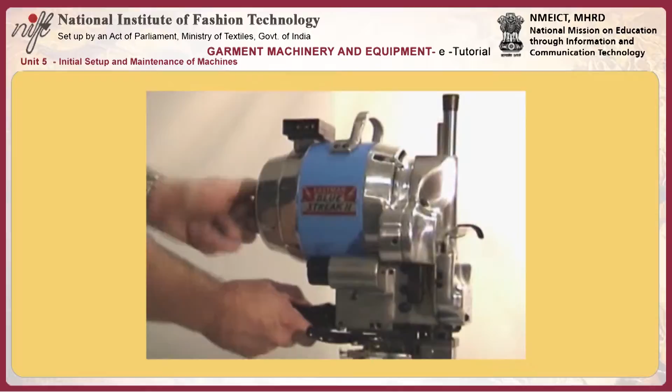Make sure that the sharpener is in the locked position. To do this, push in the turning knob. While depressing the turning knob, turn the machine over a few revolutions by hand to see if the knife reciprocates easily. If the knife does not move easily, the sharpener may be in the unlocked position.

To lock the sharpener in place, lift the release lever and press the sharpener lever to release the sharpener. Raise the sharpener bracket by hand to lock it in place. Once the sharpener is locked in place, you may disengage both the release lever and sharpener lever. Repeat this step to ensure that the sharpener is now locked.

Visually inspect the blade to ensure that the top of the knife is flush with the knife lock bolt and that the knife is perpendicular to the base plate.

If you need to adjust the alignment of the blade, check to see that the machine is unplugged. Make sure the sharpener is in the locked position. Raise the pressure foot to the top position using the pressure foot lever, which is located next to the machine operating handle. Lay the machine on a table.

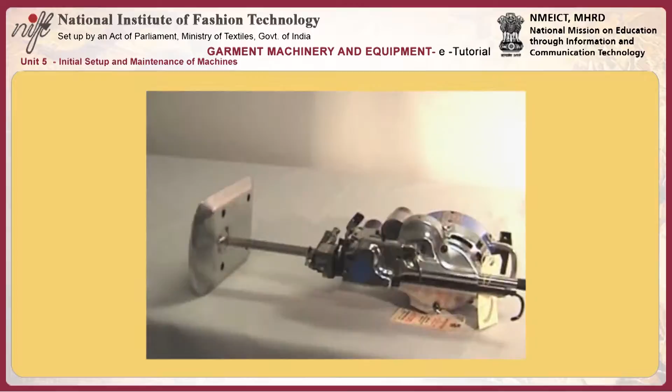Press in the turning knob and turn the knife to the bottom position. Insert the T-handle knife bolt wrench and loosen the knife lock bolt. Be sure to set the knife tightly against the knife lock bolt.

Hold the bottom of the knife against the back of the slot in the standard and tighten the knife lock bolt. After tightening the knife lock bolt, check to see if the knife runs freely in the standard by rotating the turning knob. Check that the motor switch is in the off position.

Then, connect the attachment plug to the terminal block on the machine. Hold the operating handle and turn on the machine. Allow the blade to reach full speed. If the blade is struggling, the sharpener is still not in the locked position.

If this is the case, turn off the machine and do the following. With your left hand, straddle the front of the sharpener with fingers and thumb. Press the bell crank release lever to disengage the sharpener mechanism from the motor.

With your right hand, hold the operating handle and turn on the motor switch. Allow the motor to gain full speed and then release the release lever. This automatically returns the sharpener to the locked position.

Turn the motor on and off a few times before running the machine continuously. This permits the oil to warm up and flow easily into the close-fitting moving parts. Failure to do this may result in damage to your machine.

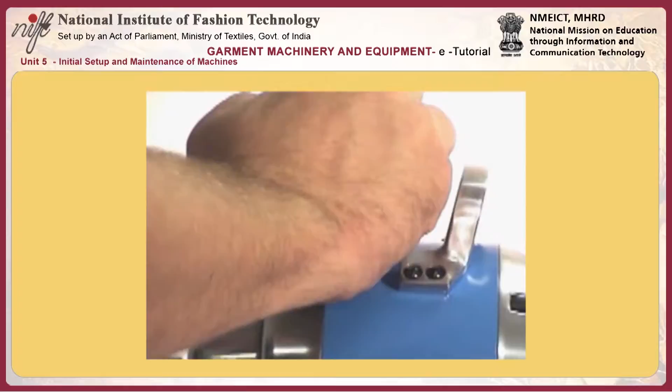Caring for your straight knife. Remember to unplug the machine before performing maintenance, adjustments, or repairs. To ensure proper operation of your machine, it's recommended that you perform the following procedures. On a daily basis, the machine operator should remove the knife and clean the knife slides with the slot cleaner.

To prevent undue accumulation of lint, do not oil the plate rollers. If the rollers stick, remove them from the plate and wash them in cleaning solvent.

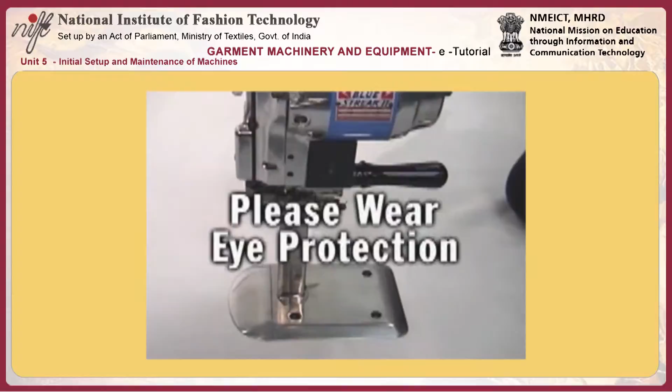Twice weekly, use an approved air hose or bellow to blow any lint from around the motor and sharpener. Remember that eye protection must be worn whenever using an air hose or bellow, as failure to do so may result in serious eye or facial injuries.

On a weekly basis, remove the cover and clean any lint from around the screw mechanism in the sharpener. If performed on a consistent basis, these preventive maintenance procedures will help you ensure years of top performance from your quality Eastman product. Should you use your machine around the clock, it is recommended that you perform these procedures more frequently.

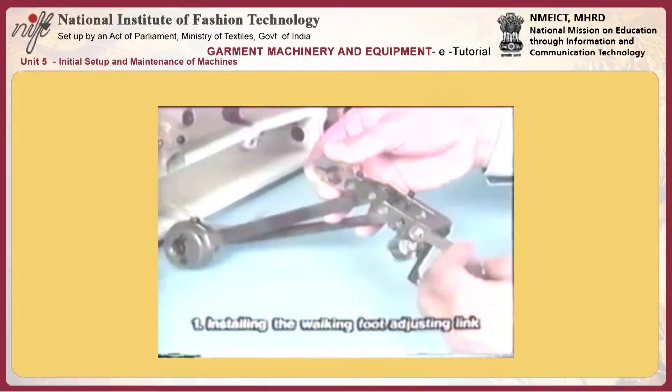Set the walking foot adjusting link as shown on the screen. Fit the feed drive eccentric cam into the frame, taking care of the correct installing direction.

Place the feed regulator mounting base pin into the hole in the feed regulator and tighten the screws, preventing play and extra load.

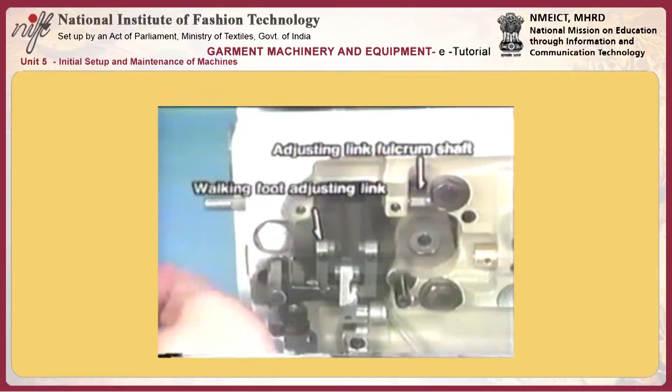Place the adjusting link fulcrum shaft into the hole in the walking foot adjusting link with its flat section facing the screw in the hole.

Adjust the position of the walking foot adjusting link so that a uniform clearance is provided on both sides of the link with respect to the frame. Then tighten the screws.

Confirm that there is no play and extra load in the walking foot adjusting link and adjusting link fulcrum shaft components.

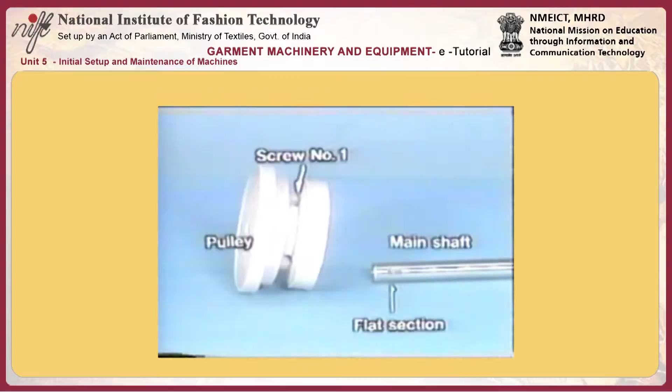Align the screw number 1 of the pulley with the flat section on the main shaft. Align the end face of the pulley with the end face of the main shaft and tighten the screws of the pulley in the flat section of the main shaft.

Make the large gear and the screw number 1 of the thrust collar face rest on the flat section of the main shaft.

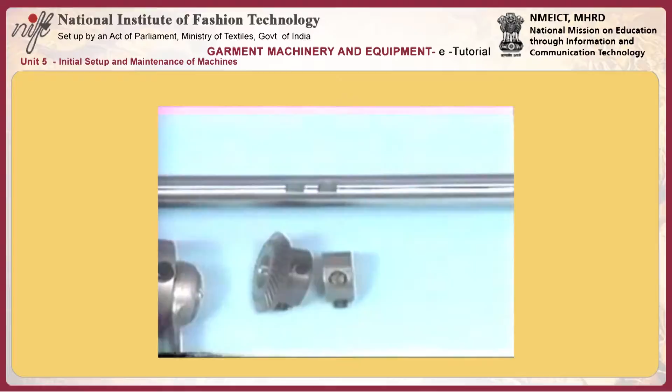Fit this screw of the counterweight into the hole in the main shaft. Fit the main shaft into the frame and the feed drive eccentric cam.

Then fit the large gear of the main shaft into the frame with its gear facing the left. Fit the thrust collar into the frame with its polished surface facing the intermediate bushing of the main shaft.

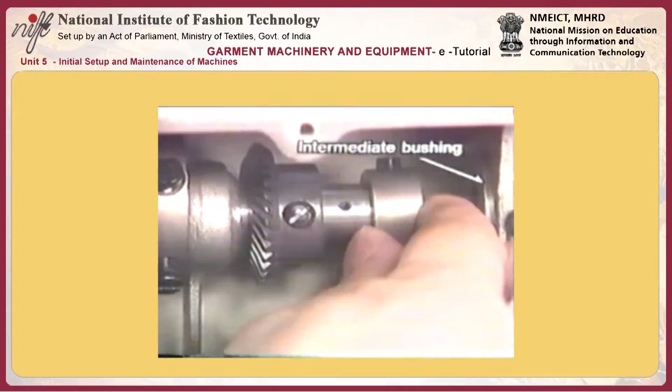Fit the counterweight into the frame, making it face this direction. Place the screw of the counterweight into the screw hole in the main shaft and tighten the screw.

Adjust the main shaft components to eliminate play. To adjust, press the thrust collar against the intermediate bushing of the main shaft, pulling the main shaft to the left.

Align the screw number 1 of the thrust collar with the flat section on the main shaft and tighten the screw, taking care not to allow play or extra load in the axial direction of the main shaft. Turn the pulley to confirm that it smoothly rotates without play and extra load.

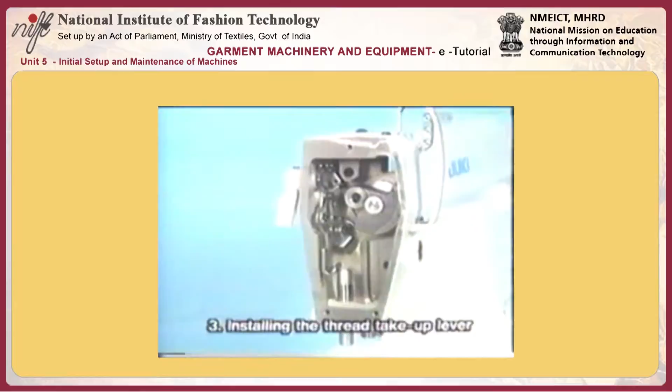Install the counterweight protecting plate in place, pressing the counterweight protecting plate against a crank oiler mount adjusting pin.

Attach the needle bearing and the thread take-up lever to the needle bar crank.

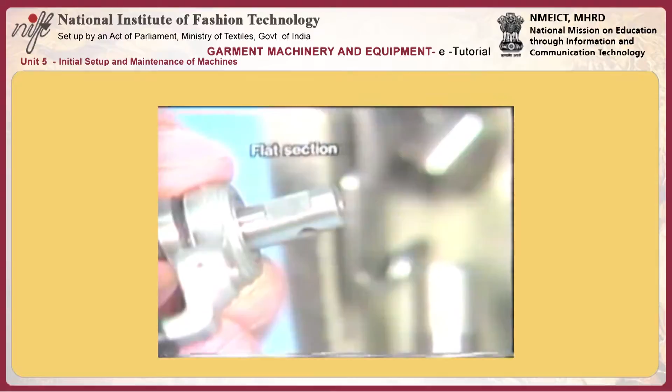Put the needle bar crank into the counterweight, making its flat section face the screw number 1 of the counterweight.

Tighten the screw in the thread take-up lever, taking care not to allow play and extra load.

At this time, confirm that the screw number 1 rests on the flat section of the needle bar crankshaft. Now tighten the screw number 1, and after that, tighten the screw number 2.

Attach the thread take-up lever holder to the thread take-up lever.

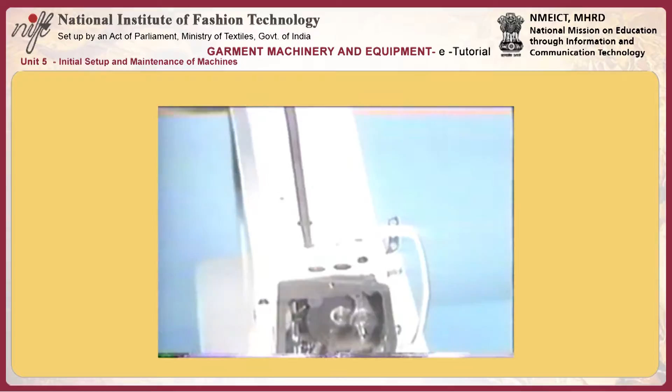Place the thread take-up crankshaft into the thread take-up lever holder with the flat section on the shaft facing above. Tighten the screw onto the flat section of the thread take-up crankshaft, taking care to prevent play.

Put the needle bar guide roller into the groove of the frame.

Attach the take-up lever needle bearing to the needle bar crank.

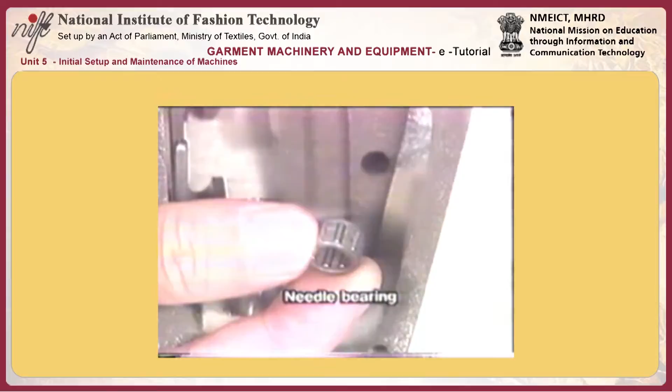Put the needle bar crank rod in place with the lubrication hole in the rod facing inside.

Tighten the left turning screw.

Place the needle bar connection into the needle bar crank rod and the needle bar guide roller.

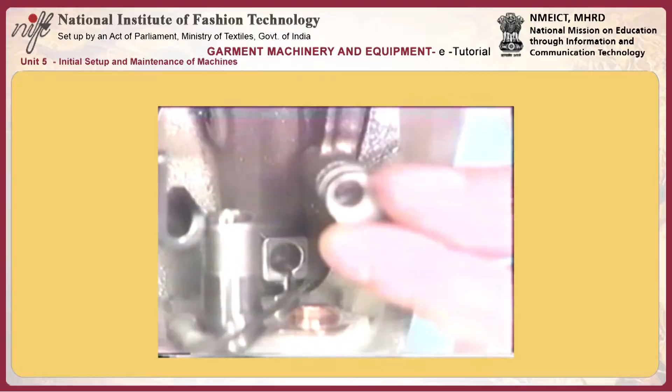Make the screw face the right.

Attach the needle bar thread guide to the needle bar and put the needle clamping screw in place.

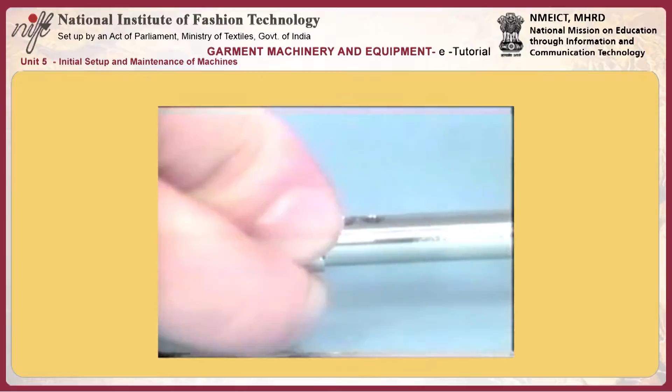Insert the needle bar into the needle bar connection from under the needle bar lower bushing. Turn the pulley to bring the needle bar connection to its lowest position.

At this time, align the end face of the needle bar lower bushing with the marker line for the DA number 1 needle engraved on the needle bar when using a DA number 1 needle.

When using a DB number 1 needle, align the end face of the needle bar lower bushing with the marker line for the DB number 1 needle engraved on the needle bar.

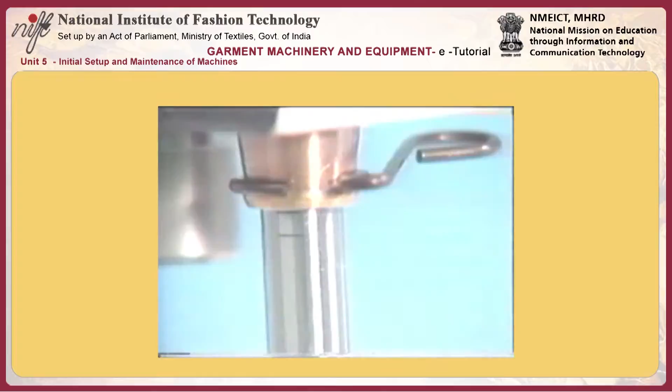Determine the direction of the needle bar so that the needle clamping screw faces the right-hand side.

Tighten the needle bar connection screw.

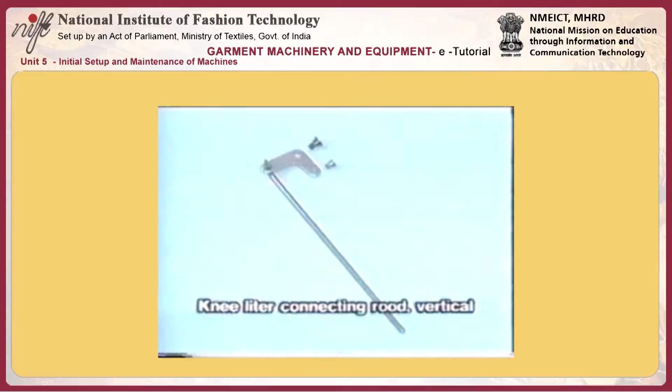Insert the vertical connecting rod of the knee lifter into the hole in the frame. Then put the knee lifter link in place using a hinge screw.

Install the knee lifter link and the horizontal connecting rod of the knee lifter in place using a hinge screw.

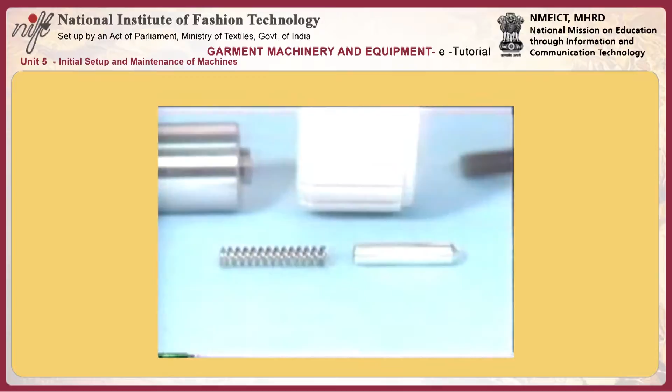Place the feed regulating pin spring and the feed regulating pin into the hole in the frame. At this time, be sure to put the spring first into the hole.

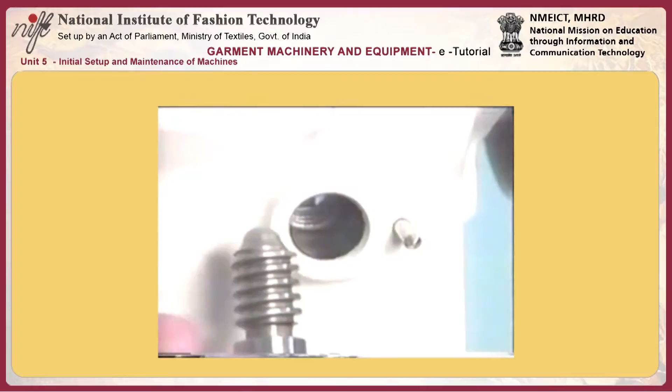Now fit the feed regulating pin spring into the hole in the frame. Then place the feed regulating pin also into the hole with its sharp point end facing outside.

Install the feed regulator screw in place and attach the feed dial over it. Turn the screw in the feed dial until the top end of the feed regulator screw comes in contact with section A of the feed regulator.

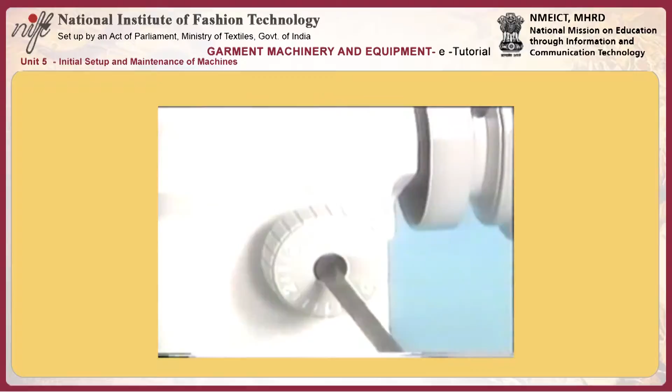Tighten the screw until it will not go any further against the feed regulator. This makes the stitch length 0.

Hold the feed dial by hand and loosen the screw in the feed dial. Turn the feed dial until 0 on its scale is straight up and tighten the screw in the feed dial.

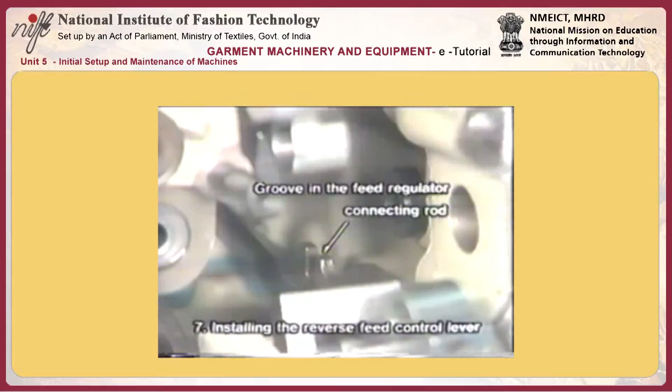Fit the pin of the feed reverse arm into the groove in the feed regulator connecting rod.

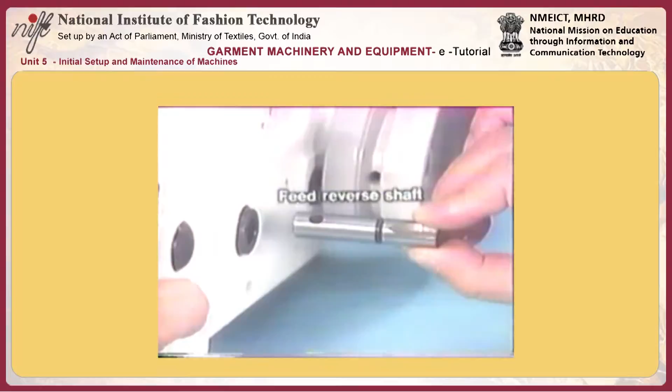Holding the feed reverse arm with your fingers, fit the feed reverse arm onto the feed reverse shaft in this direction with its V-shaped groove facing upward, taking care not to allow the O-ring to be damaged.

Then place the screw of the feed reverse arm in the tapered hole in the feed reverse shaft and tighten the screw.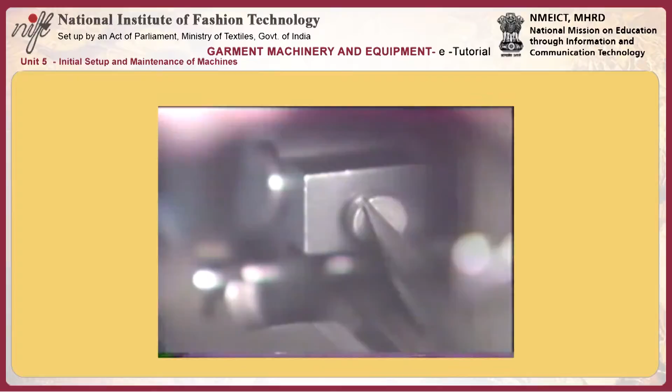Fit the screw of the reverse feed control lever in the V-shaped groove in the feed reverse shaft.

Depress the feed reverse shaft, tighten the screws, taking care not to allow play in the shaft and to prevent an extra load from being applied to the shaft.

Confirm that the reverse feed control lever smoothly moves and there is no play in the shaft.

Put the reverse feed control lever spring and the adjusting link spring onto the feed spring hook.

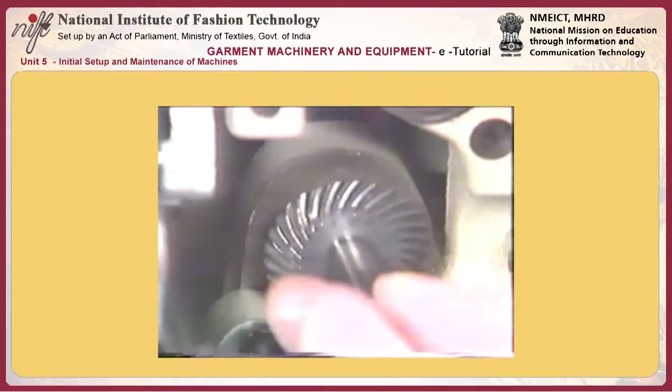Put the pinion onto the upright shaft. Align the screw number 1 of the pinion with the flat section on the upright shaft.

Pushing up the upright shaft and pressing down the pinion, tighten the screw number 1 first and then the screw number 2.

Confirm that there is no play in the upright shaft and that an extra load is not applied to the shaft.

Insert the hook driving shaft into the frame.

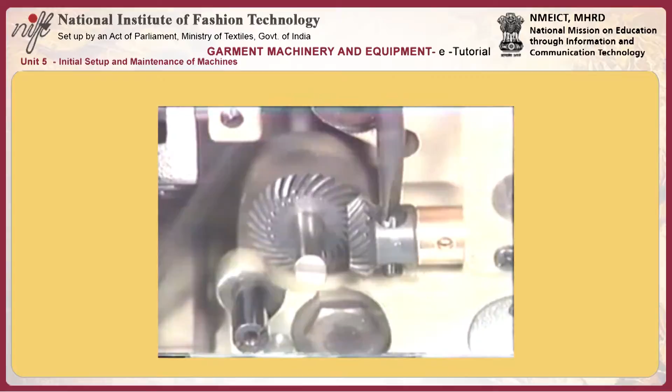Tighten the screw, pressing the thrust collar against the bushing.

Align the screw number 1 of the gear with the flat section of the main shaft and temporarily tighten it.

Adjust the clearance between the gear and the pinion to 0.05 to 0.1 millimeter by moving the gear.

Check the clearance by moving the gear of the upright shaft. Securely tighten the screw in the gear.

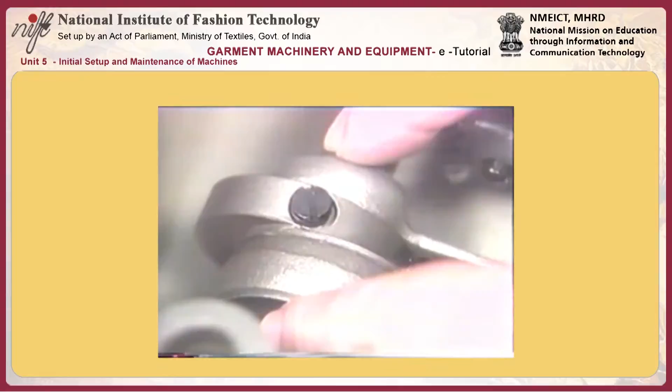Move the feed drive eccentric cam to the left or right until it is brought to about the center of the play. Make the pulley run idle and adjust the center of the feed drive eccentric cam. Then temporarily fix the cam at that position.

Insert the longer feed rocker shaft into the bearing. Then fit the thrust collar in place with its polished plane facing the feed rocker shaft bushing.

Fit the feed rocker shaft into the feed rocker shaft crank.

Make the lubrication hole in the feed rocker shaft face downward and fix the shaft in place using the thrust collar while taking care not to allow play and extra load in the shaft.

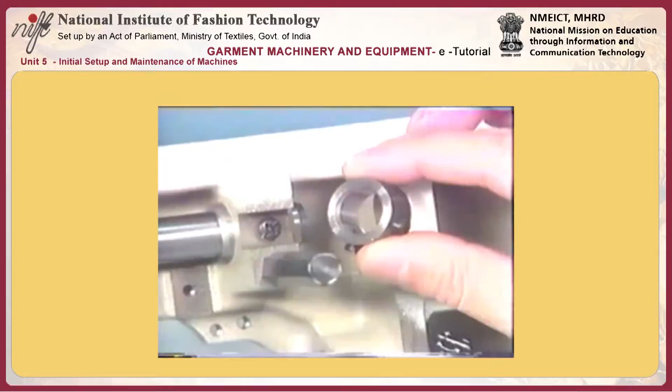Insert the feed driving shaft into the rear crank. Make the lubrication hole in the feed driving shaft face downward and fix the shaft in place using the thrust collar, while taking care not to allow play and extra load in the shaft.

Make the lubrication hole in the feed driving shaft face downward and make the pulley run idle until the pulley starts rotating lightly. Then tighten the screw in the rear crank.

Fix the feed dog on the feed bar temporarily.

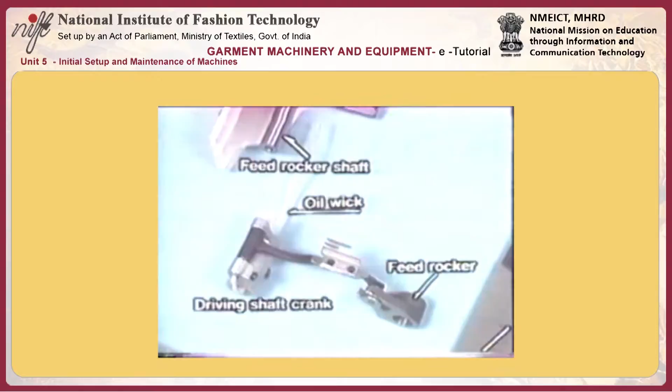Pass the oil wick through the feed rocker shaft. Attach the feed rocker and the driving shaft crank to the feed rocker shaft and feed driving shaft respectively. Draw out the oil wick from the lubrication hole in the feed rocker shaft crank. Attach the throat plate to the table with screws.

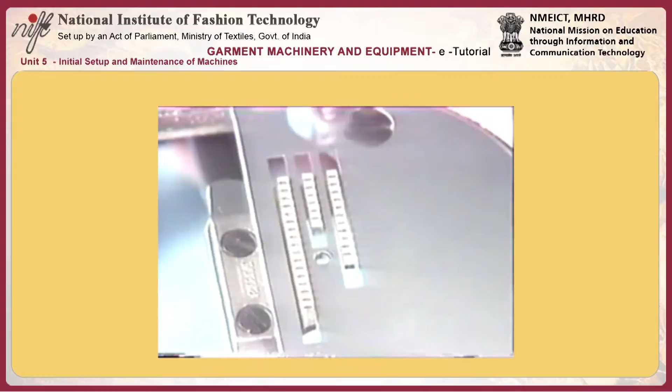Adjust the position of the feed dog so that it is placed in the side-to-side center of the throat plate. To adjust the position of the feed dog, move the driving shaft crank and the feed rocker to the left or right. Make the oil wick face downward and tighten the screw in the feed rocker.

Tighten the screw in the driving shaft crank temporarily. Turn the pulley until the feed dog is brought to its highest position. Adjust the height of the feed dog by means of the driving shaft crank so that it is 0.8 millimeter above the throat plate surface when the feed dog is in its highest position.

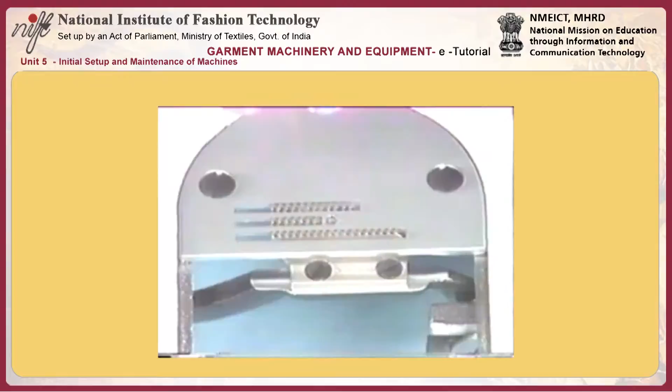Set the feed dial to its largest value of 4 millimeters. Tighten the screw in the feed rocker shaft crank temporarily. Adjust the longitudinal position of the feed dog by moving the feed bar so that the clearances A and B become equal. Tighten the screw in the feed rocker shaft crank.

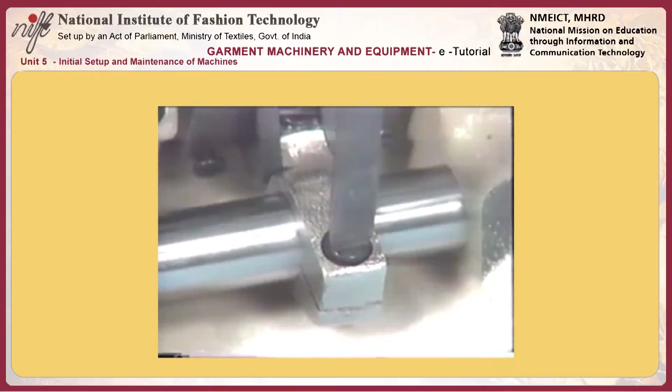Insert the needle into the hole in the needle bar until it will go no further. Make the long groove of the needle face exactly to the left. Then tighten the screw.

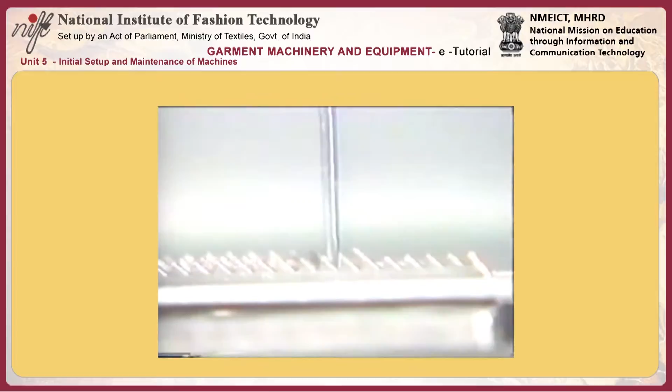Now the feed timing is adjusted so that the crest of the descending feed dog is flush with the throat plate surface when the top end of the descending needle eyelet is 3 millimeters below the throat plate surface.

The feed timing is adjusted by means of the feed drive eccentric cam. First, set the screw number 1 of the gear almost in parallel with the screw number 1 of the feed drive eccentric cam and tighten the screws temporarily.

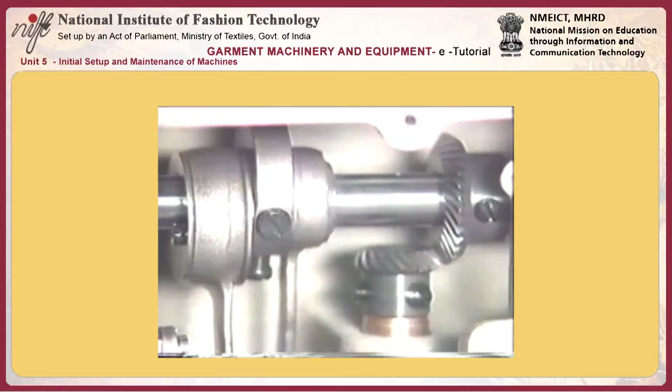Turn the pulley and make the crest of the feed dog flush with the throat plate surface when the feed dog starts going downward. Then loosen the screws in the feed drive eccentric cam and make the cam free from the main shaft. Turn the pulley so that the top end of the needle eyelet comes down 3 millimeters below the throat plate surface by moving the needle up and down.

Tighten the screws in the feed drive eccentric cam.

Put the main shaft oil tube into the frame.

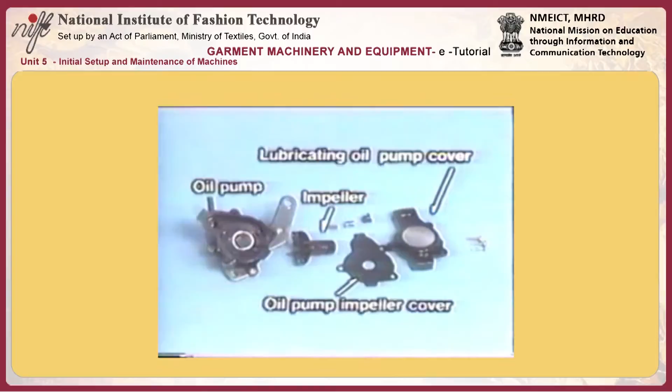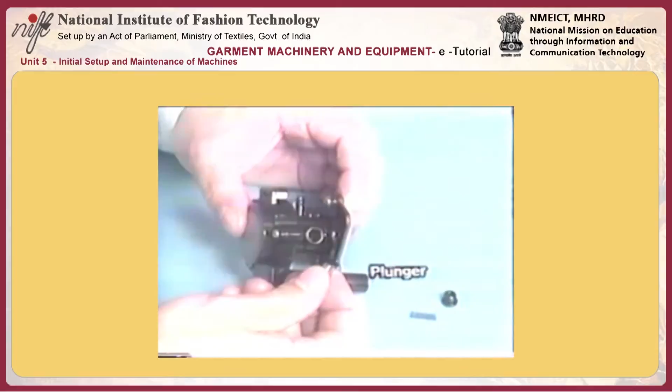Fit the impeller into the oil pump. Put the oil pump impeller cover and the lubricating oil pump cover on the oil pump. Attach the plunger, plunger spring and plunger screw in place.

Insert the oil tube into the lubrication hole in the hook driving shaft front bushing.

Insert the main shaft oil tube into a rubber joint of the oil pump. Insert the other oil tube into another rubber joint of the oil pump.

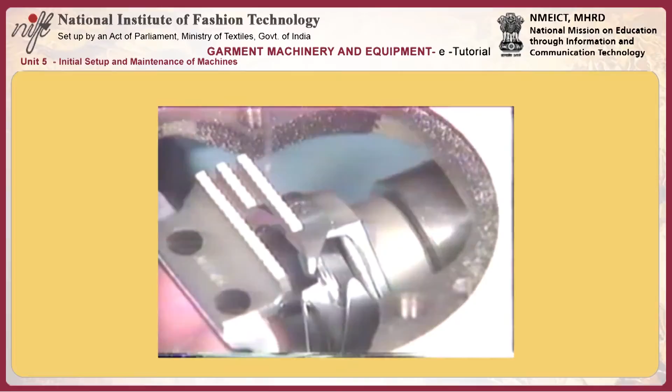Raise the needle and fit the hook into the hook driving shaft. Hold the bobbin case by hand to prevent the hook from coming in contact with the needle and lower the needle.

Adjust the timing in this way. To adjust, turn the pulley in the normal way and bring the needle to its lowest position. Then align the end face of the needle bar lower bushing with the lower marker line engraved on the needle bar.

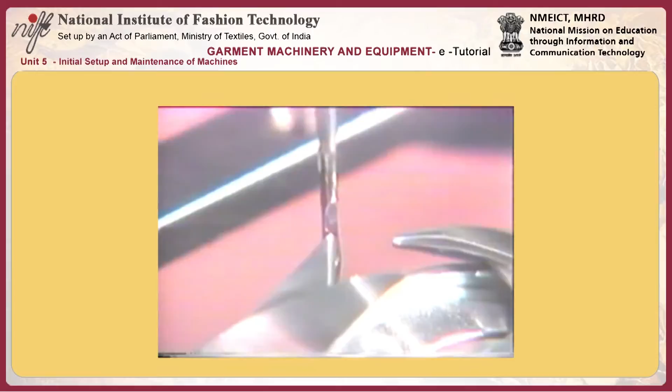At this time, the axis of the needle should be aligned with the blade point of the hook. Also, adjust the clearance between the needle and the blade point of the hook to 0.02 to 0.05 millimeter by moving the hook. Then tighten the screw in the hook.

Insert the positioning finger into the indented part of the bobbin case with the needle entry groove in the bobbin case facing upward. Then tighten the screw in the bobbin case temporarily.

Bring the needle down and move the bobbin case so that the needle enters the bobbin case as far as 1/3 the length of the needle entry groove in the bobbin case.

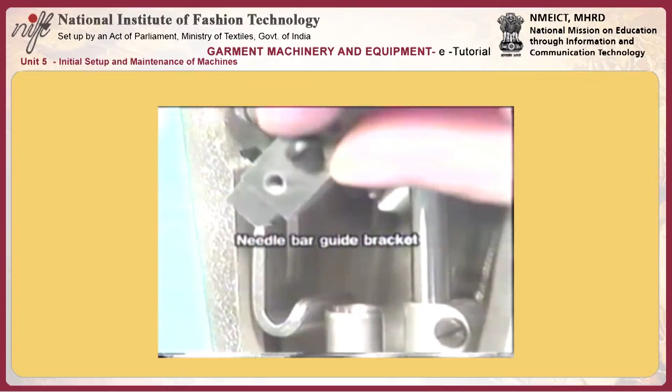Fit the needle bar guide bracket into the groove in the frame. Insert the presser bar into the needle bar guide bracket from above.

Install the presser foot by means of a screw.

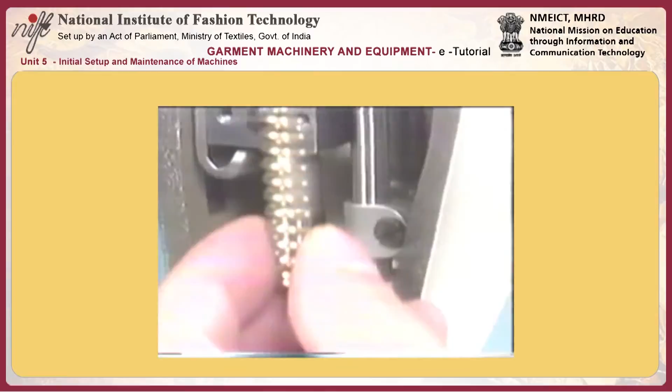Lower the needle, taking care not to allow the needle to touch the presser foot. Fit the presser guide bar into the presser spring, then insert them into the presser bar.

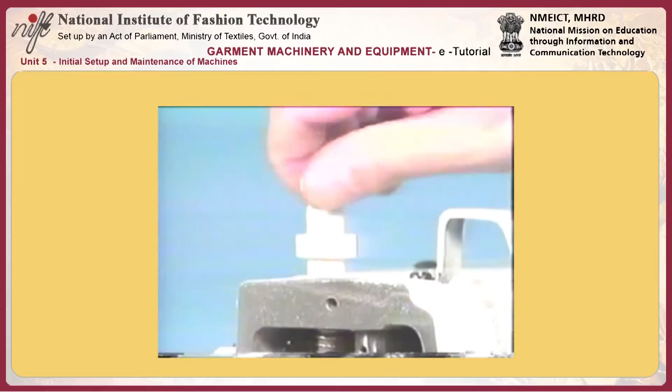Turn the presser spring regulator until its height is adjusted to 27 to 30 millimeters. Then fix the presser spring regulator at that position by a nut.

Fit the presser bar thread guide into the groove located next to the tension controller. Then tighten the two screws.

Lower the hand lifter. Lower the needle, taking care so that the needle will not touch the presser foot.

Then adjust the position of the presser foot so as to place the needle in the side-to-side center of the groove in the presser foot. Lower the needle bar guide bracket by hand and tighten the screws.

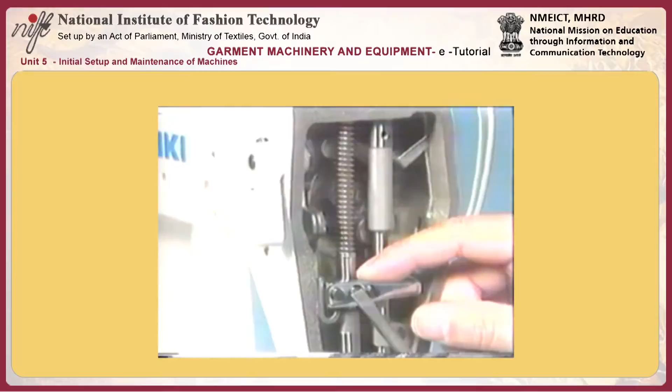Confirm that the clearance of 5 to 5.5 millimeters is provided between the presser foot and the throat plate when raising the hand lifter.

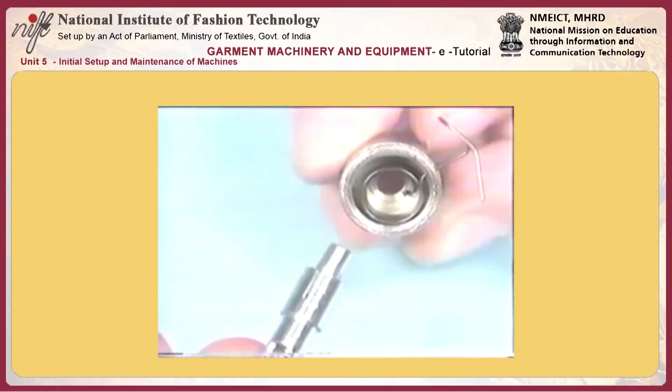Pass the end of the take-up spring through the slit in the tension post socket. The coiled part of the spring is housed in the tension post socket.

Turn the tension post clockwise to adjust the take-up spring pressure to approximately 20 to 30 grams. Then tighten the screw in the tension post.

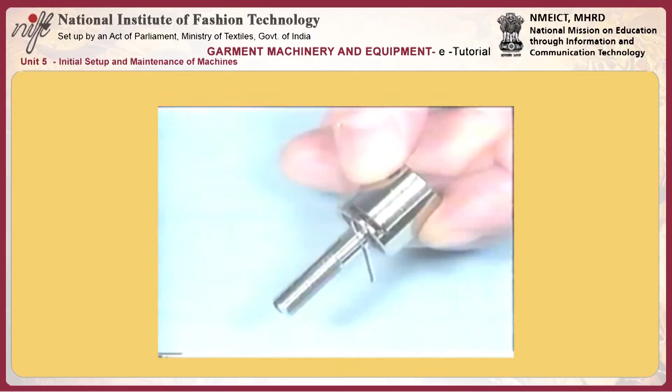Attach two tension discs back to back to the thread tension post. Then add the tension disc holder, tension spring, tension disc stopper, and tension nut in that order.

Insert the tension release supporting pin in this way. Press the tension release pin spring against the inserted pin.

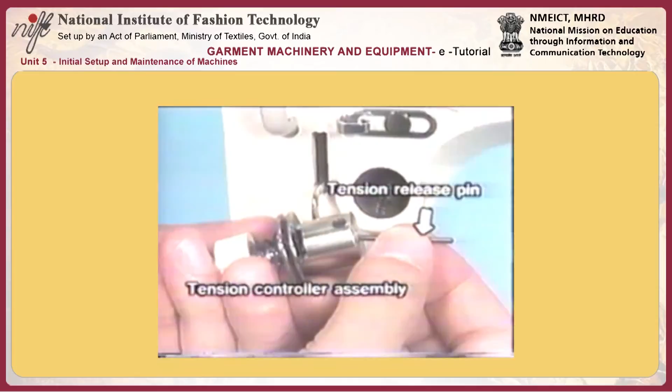Insert the tension release pin into the tension post with its round end outside. The tension release pin is passed into the coil spring and install the tension controller assembly on the machine frame.

Lower the hand lifter and then move the tension controller assembly to the left or right to adjust the strokes of the presser bar thread guide and top end of the take-up spring to 6 to 8 millimeters.

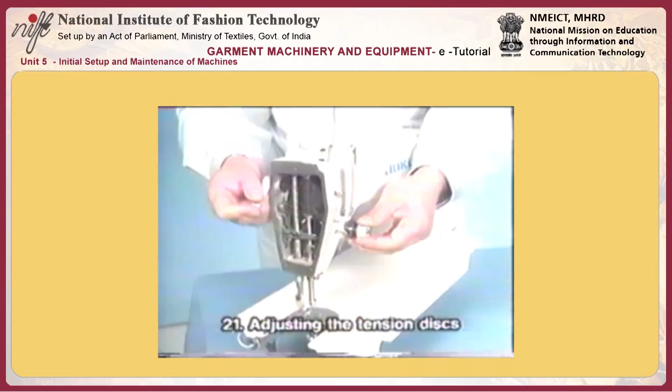Adjust the height of the tension controller assembly so that the tension discs start separating from each other when the presser foot ascends 3 to 4 millimeters.

Confirm that the tension discs are separate when the hand lifter is raised and that they come in contact with each other when it is lowered.

After the adjustment, tighten the screw for the tension post socket.

Attach the packing correctly to the side plate and fix them to the machine head.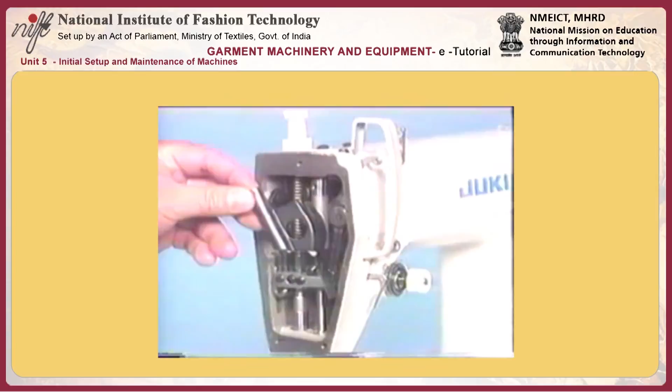Move the arm oil shield for the faceplate to the left or right, taking care so that it will not touch the take-up lever. Then tighten the screw.

Attach the faceplate to the machine head.

The one-needle lock-stitch machine head is set up in the way as explained. When assembling the components, be sure to check every component assembled for play, extra load, or hindrance of motion immediately after it has been set up. Then proceed to the next assembling step.

It is very important for you to actually handle and operate your sewing machine by yourself until you are familiar with the operation of your machine. Practice the assembling procedure until you can smoothly set up your machine.